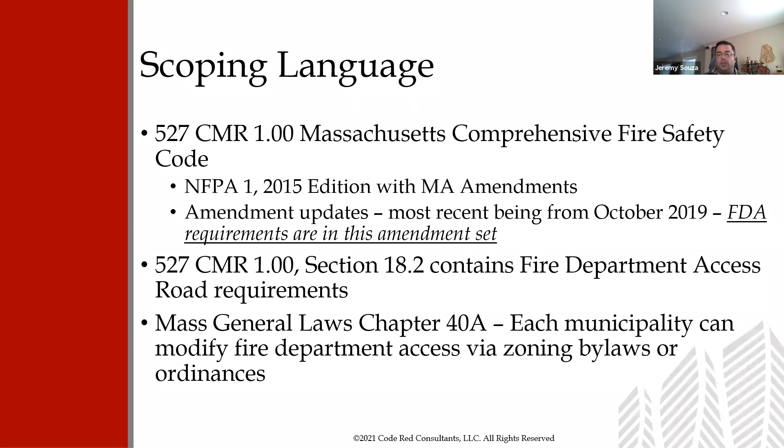Now, beyond that, the fire code flat out says that Massachusetts Chapter 40A overrules anything in 527 CMR, and that's local zoning. So if a municipality chooses to go through its zoning process, they can change all of these fire department access requirements. Roads can get wider, roads can get skinnier. Vertical clearance can get taller or not. Different access things can get thrown in that we're not used to seeing. So while everything we're going to speak to this morning is regarding 527 CMR requirements, keep in mind that the municipality may have changed something in their local zoning, and it would behoove us to take a look at their zoning requirements as we start to dig into what will work for that particular community.

So the roads themselves. Jeremy? Yes. Sorry, quick question. So that seems really unique to me. Is that really not creating local building codes if you can modify the fire department access on a town-by-town basis? It's not the building code. The building stays the same, but what goes on around the outside of the building can change. I think that's how they thread that needle. Interesting. Thank you.

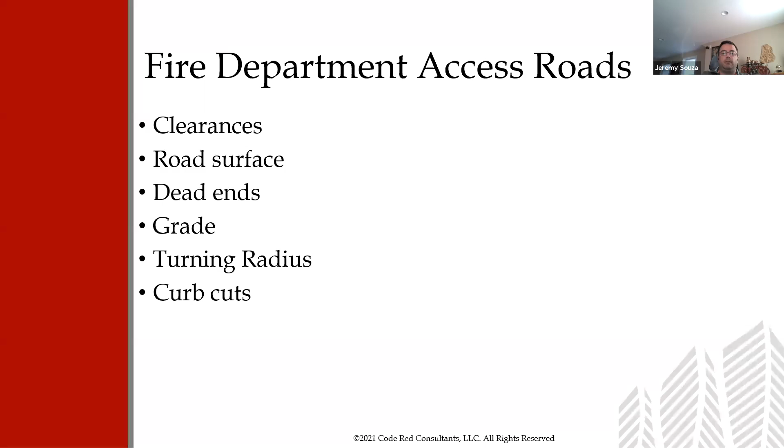So with the fire department access roads themselves, we have clearances, road surfaces, and then some of the curious geometry stuff that we sometimes struggle with. So what is an access road really? As far as code compliance, what does the fire code say? It's a road that guarantees I can put a fire engine next to the building. Unobstructed 20 feet, vertical clearance of 13 foot 6 inches.

And if I have boulevard roads, which we'll speak to a little bit later, lanes between 10 and 20 feet cannot provide direct access off of those. And again, we'll speak to exactly what that means later. So from the code compliance world, if your road is less than 20 feet, or does not have unobstructed vertical clearance of more than 13'6", it's not a fire department access road.

Full stop. That said, in reality, if you can drive on it, it's going to be a fire department access road. If the building is legitimately on fire, the fire department will put a fire engine on your front lawn, or try to drive it through the grass to put it somewhere where they need it to go.

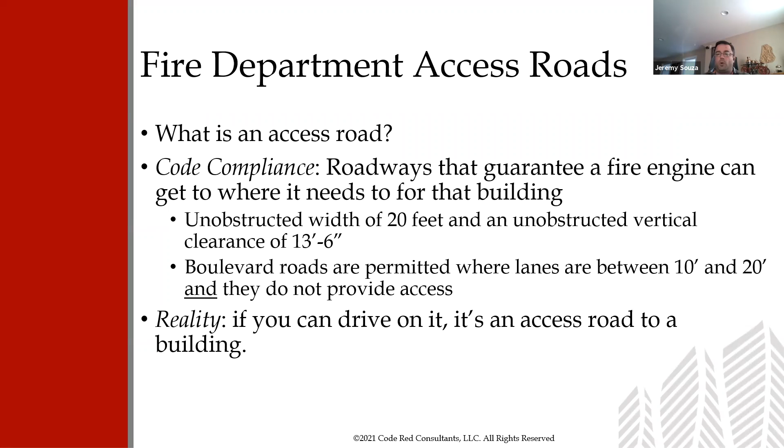The fire code doesn't prescriptively say, yeah, that's okay. So that turns into a little bit of a touchy subject in some cases, that the code says you will give us a road, even though we all know we're going to do off-road driving potentially to try to get where we need to. So this width and height thing, why 20 feet, why 13.5 feet tall?

Most fire engines are 8'6" wide. There are some that are a little bit wider than that, plus the mirrors extend a little bit beyond. If you have a ladder truck, they can be up to 13 feet tall. Most of them are just about 12 feet tall, but you can have some that are 13.

On tops of fire engines, there is equipment that firefighters have to stand on top of the truck and remove the equipment. They're already 9 to 10 feet up in the air. Now you put a 5.5 to 6 foot tall firefighter on top of the truck, and there's where we're getting 13 feet.

The trucks will likely need to be able to pass each other. So if I've got two trucks that are 9 feet wide, a 20 foot wide road is just about enough to get two trucks to pass if they park them right.

To be able to squeeze trucks into the scene, sometimes they'll need to be able to park next to each other. And ladder trucks have jacks or outriggers, little arms that come out of the truck to stabilize it before the aerial can be lifted out of the bed. That requires additional width for the truck, sometimes up to 18 or 19 feet, depending on the manufacturer of the truck.

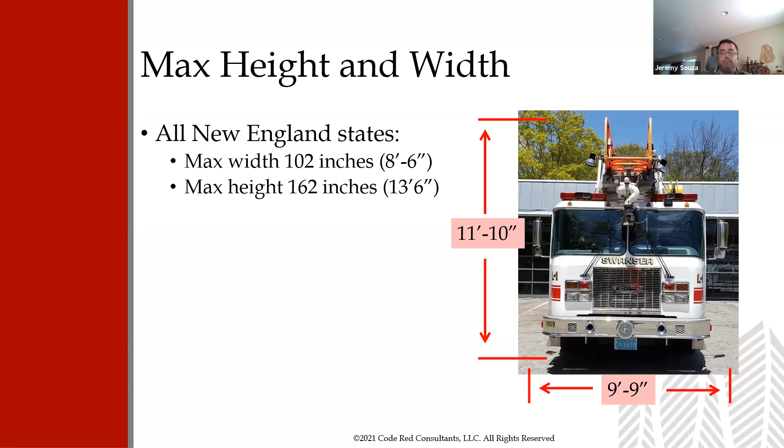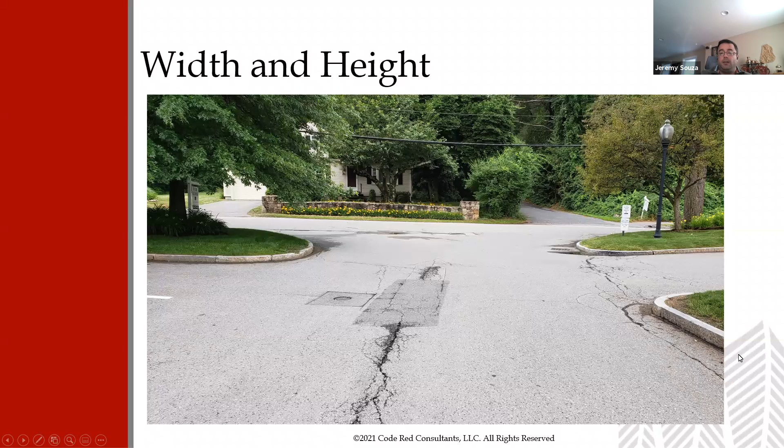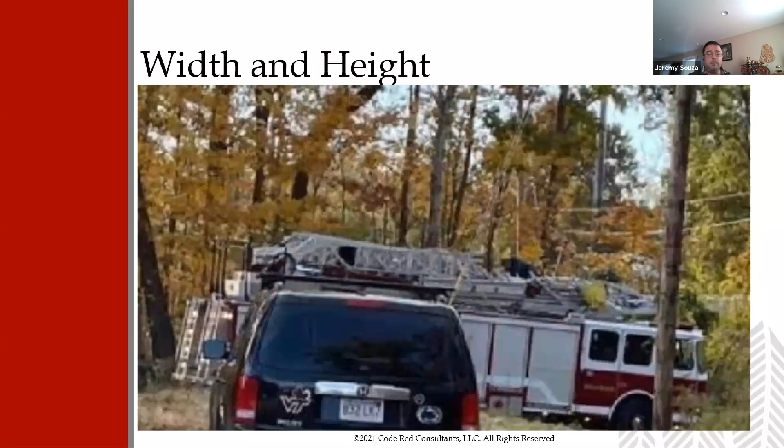Nothing has changed with the facility since the 1950s, except for their fire alarm system, I suppose. But this is the roadway that we have to use to get to it. It is far from 13'6" vertical clearance and far from 20 feet wide. But again, it's existing. It's something that's tolerated by that community.

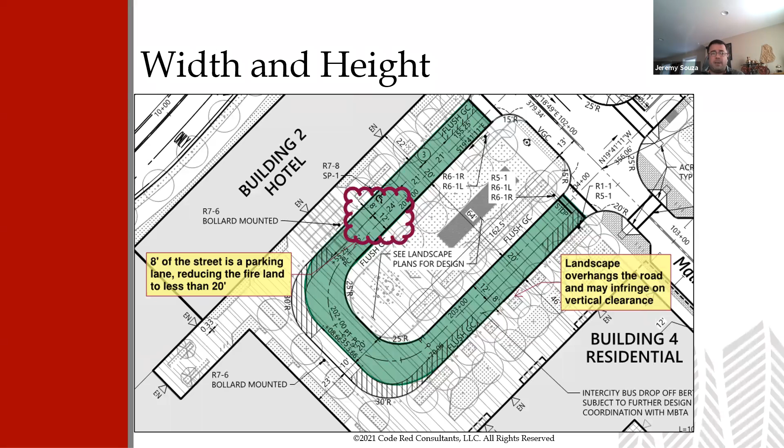which trees are great. I spend many of my free hours in the woods, so I'm perfectly happy with trees. That said, trees and fire trucks do not necessarily mix. As the trees overhang the road, now you reduce that vertical clearance. And at some point, 20 to 30 years from now, sure, the trees might be over the road and be able to be pruned back. But for some period of time, that's probably not going to work out.

So you can see with this particular drawing for this subdivision or this development that's going in, they're showing the road is 24 feet wide. Excellent. That's what we like to see. The wider the roadway is, the better in most circumstances, at least from the fire department perspective.

We talked about boulevards briefly. If you're not familiar with what a boulevard road is, this is a picture of one. So you've got two lanes in opposite directions, separated by some sort of a median or an esplanade. The requirement with boulevard roads is that the road itself, nothing can come off of it. So really, this roadway just becomes a conduit to get to the end of that roadway.

As you can see in this case, there's houses, driveways of houses that are entering this boulevard. As far as the fire code is concerned, that's no longer permissible. You're not allowed to have anything that comes off of a boulevard road. Local zoning, however, said that this is okay for this particular neighborhood.

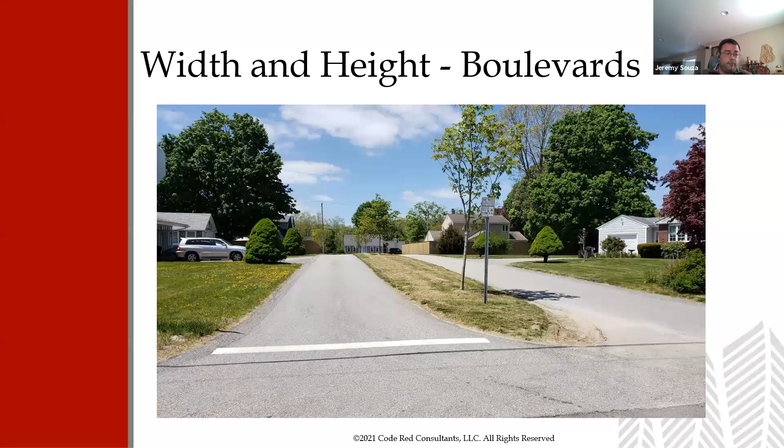Excuse me for a second. There we go. All right.

Gates. You are allowed in certain circumstances to have gates across roadways with fire department approval. And the approval of the AHJ is always, again, a very squirrely and wiggly thing. If you are anticipating a gate for the project, please make sure it is a UL listed gate. UL 325 is meant for vehicle roadways, and it includes automatic openers for emergency vehicles.

Usually those automatic openers are a microphone that's listening for a certain type of siren that most emergency vehicles have. So you can set the siren to this yelp mode. The gate hears it and opens up automatically. Some gates will have essentially a garage door opener. And the intent is that the owner of the building or the owner of the property will give that garage door opener to the local fire department and say, here you go, now you can get through my gate.

The downside of that is at some point you have too many gates and you have 30 or 40 garage door openers hanging across the roof of your fire truck, trying to remember which one it is that opens this door. So most fire departments are hesitant to go the garage door opener route.

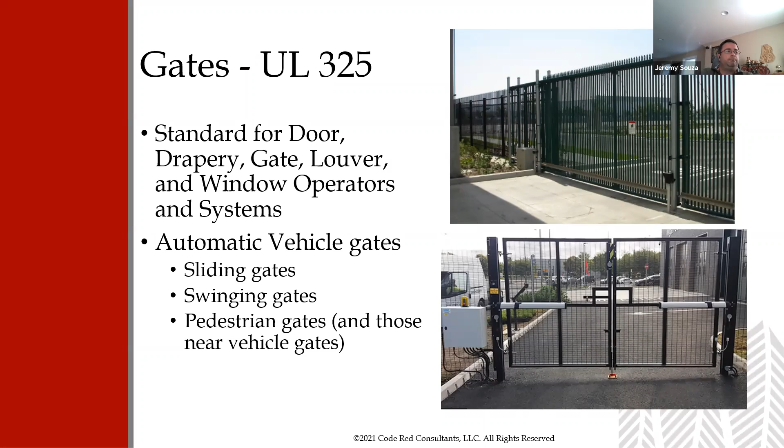So that's it for the road itself, the vertical height and the width. Let's talk a little bit about the surface for the road. It's got to be strong enough to support a fire truck. Well, what exactly does that mean? So the imposed loads of fire engines, an engine or a rescue can weigh up to 54,000 pounds. Usually that 54,000 pounds is spread across 6 tires, in some cases 10 tires.

Ladder trucks and tankers can weigh up to 80,000 pounds, spread across usually 10 tires, in some cases only 6 for smaller trucks. For aerial ladders, when they put those jacks out, the ground pressure underneath those jacks can be up to 75 psi, which is quite a substantial loading.

We'll often see in designs, and this comes from the civil engineering folks, this H20 requirement, or HS20, HS20 being a semi-trailer. There is a newer standard for H25, which is a little bit stronger, but I haven't seen H25 come across any drawings that I've reviewed in the past 6 or 7 years, I guess.

This H20 requirement is a 32,000 pound axle, so you can have up to 8,000 pounds per wheel because you can have up to 4 wheels per axle. That said, the front axle is only 2 tires, so that's only 16,000 pounds. Really, make sure the civil engineer knows what's going on with this when they're designing your roadways.

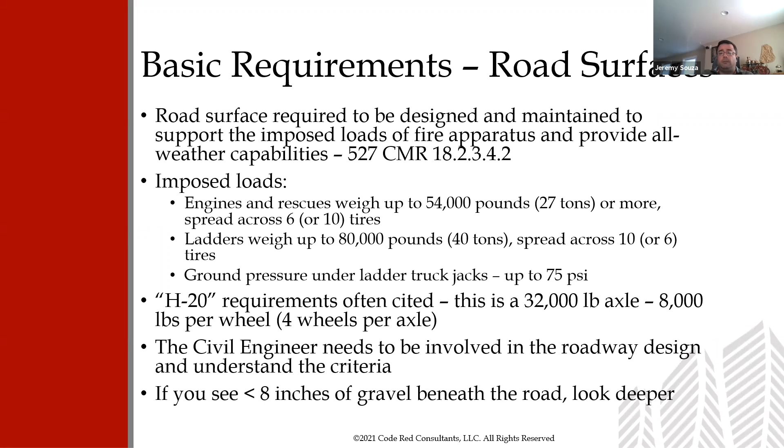And from our perspective, on quick plan reviews, if you see a sectional drawing of a roadway and you see less than 8 inches of gravel underneath the road, start asking questions. If you're less than 8 inches of gravel, something weird is going on, and we probably need to make sure everybody knows what's going on.

The maximum weights that we usually see for fire engines. So we have commercial fire engines, so the front of it looks like an 18-wheeler truck, or the tractor of an 18-wheeler. Custom engine is usually the flat front of a fire engine. Tankers, which carry a lot of water. Then we have ladder trucks, just a regular straight ladder truck or a tractor drawn aerial, the kind with the person who steers in the back of the truck, the end of the trailer.

You can see the weights that we've got here on the steering axle. Obviously, it's the front wheel, and then if you've got a single rear axle or 2 rear axles, how much weight we're putting on. Those ones are overweight.

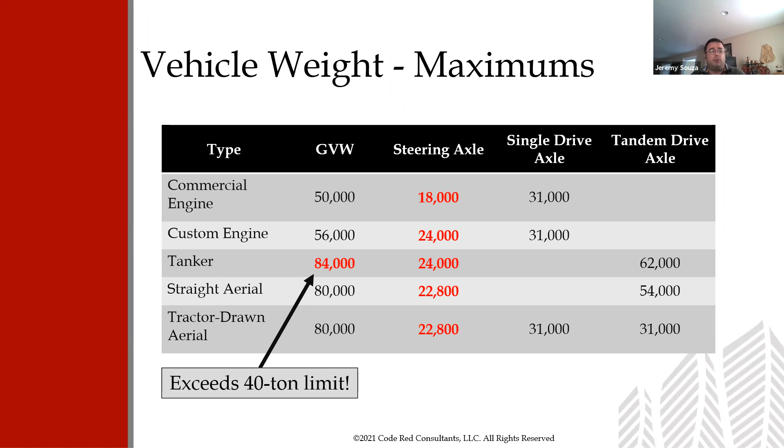So for those H20 requirements, before anything bad happens, we are already claiming, yep, we overload your bridge or your roadway. So this is something that the engineer needs to be aware of. The tanker weights can exceed the 40-ton weight limit. If they weren't fire engines, you would not legally be able to drive them on a public road without a permit. And that 8,000 pound per wheel H20 rating, the front wheels on almost any fire engine exceed that.

As a quick example, this is just one screenshot from one drawing that came across my desk for a culvert pipe. And the design parameters: live load HS20-44. So that's that H20, the S for semi-truck, so there's an extra axle thrown in. And the -44 means it was the 1944 edition of that standard, which is still the one that's in use today.

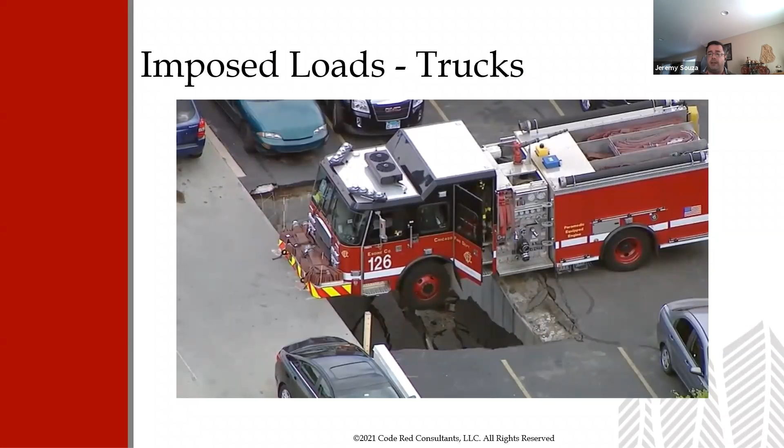When it all goes wrong, this is what happens. This is Chicago Fire Department. They were driving across an elevated parking structure, and the parking structure gave way. Which again, that's a bit of a surprise. This was a washout of a road. This is Los Angeles, California. And again, this is more of a road maintenance issue as opposed to a design issue, but still a roadway weight bearing capacity problem.

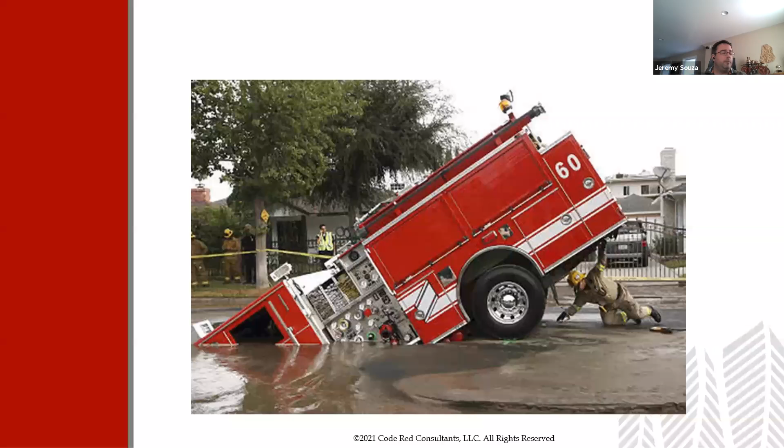So we mentioned briefly earlier about aerial ladders and those jacks. These are the jacks on this particular model of ladder truck. They come out about 2 feet, come down to the ground, and they will lift the entire truck off the ground. In this case, this ladder truck weighs 66,000 pounds. That 66,000 pounds is going to be distributed across 4 square feet as this truck is lifted up. And the weight is going to shift around as the aerial moves. As we rotate the ladder off to one side or the other, you'll shift the weight of the truck from one jack to another.

Realistically, the NFPA 1901 standard for how to build fire engines says you can have up to 75 PSI ground loading. That said, I can take an 80,000 pound tower ladder, put the jacks down, and manage to get the truck to balance on 2 jacks. Eventually, it's going to settle onto at least 3. You should have it across all 4, evenly distributed, but sometimes weird stuff happens. Realistically, you can have up to 278 PSI underneath those jacks, which is an awful lot of weight for the pavement to be bearing.

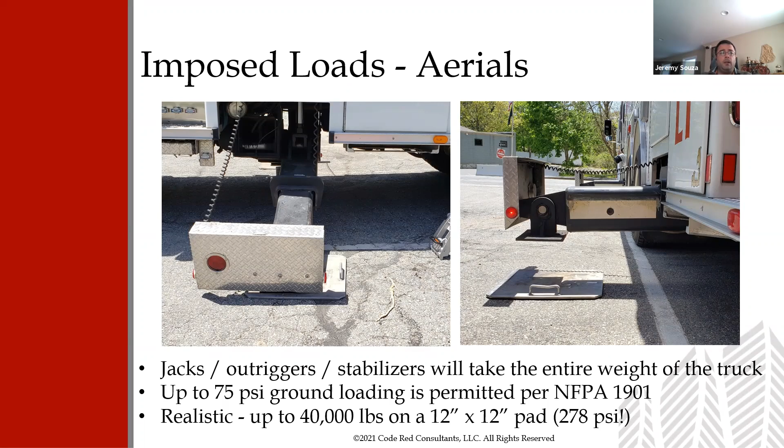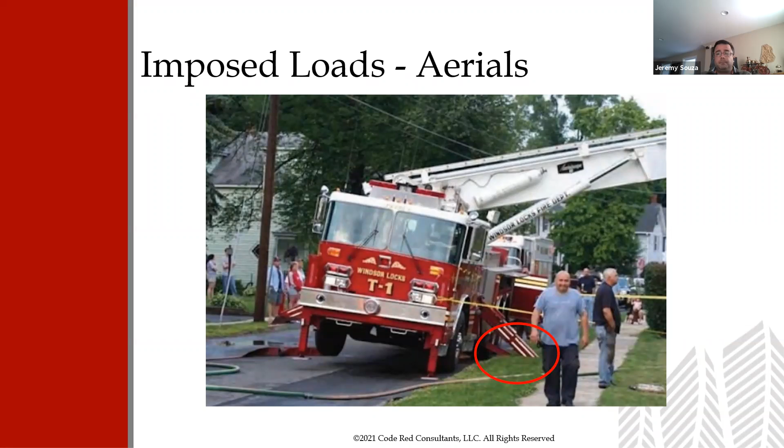Road surface itself is usually asphalt or concrete, just like almost any road we see anywhere. In a lot of communities, particularly rural communities, gravel might be acceptable, and that's totally up to the locality where you are. Geogrids, which we've seen underneath gravel, have a maximum of 200 tons per square meter, which comes out to 284 PSI. That's a pretty strong surface to be able to operate a fire engine on.

We've also had some projects recently where the design team wanted to use essentially a grass roadway using permeable pavers, but make the roadway completely blend into the grass. From an aesthetic standpoint, sure, it looks great. From a maintainability standpoint, the first time it snows, a snowplow is going to take all that grass and roll it up in a big muddy mess. So from that perspective, I would hesitate to push that.

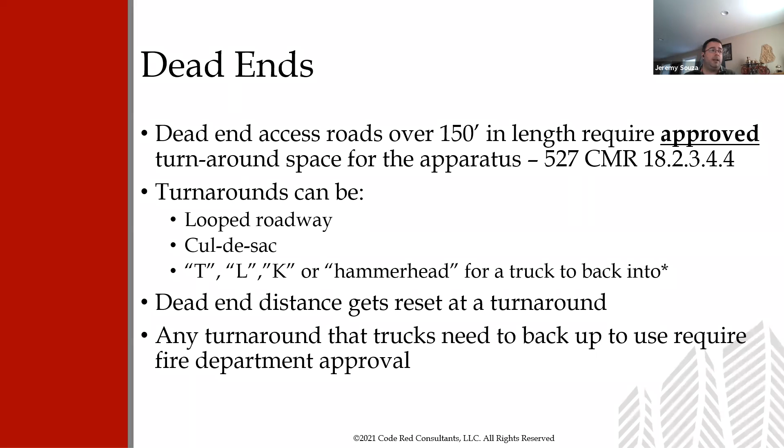And again, it's that approved word. Once we throw in the fire code, something has to be approved by the AHJ. Now the sky is the limit for whatever they want to demand. And that makes it very difficult for us to predict what's happening.

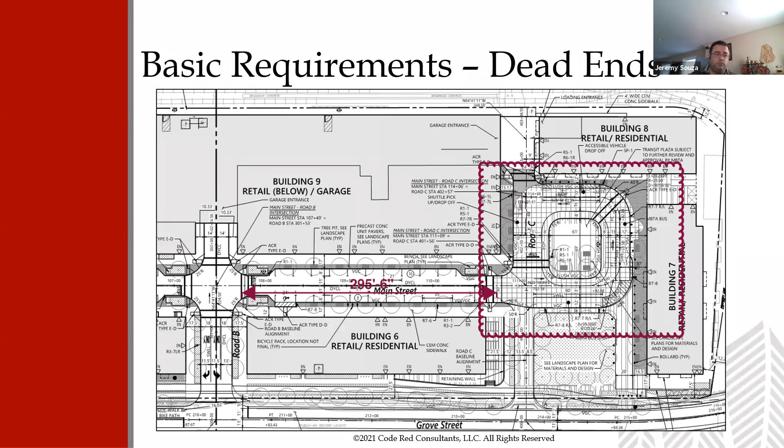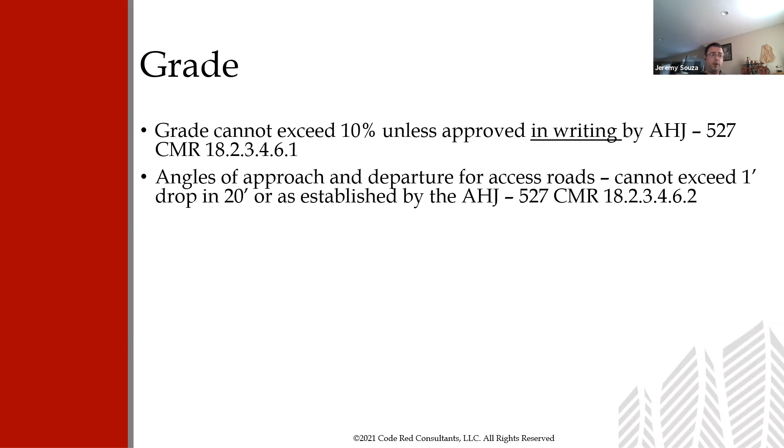So grade, how is our road pitched? Grade cannot exceed 10% unless approved in writing by the AHJ. This isn't, oh, we had a meeting with the fire department and they said it's okay. You need a letter from the fire department that says grade can be more than 10% if you have that on your project. Angles of approach and departure cannot exceed 1 in 20, or as established by the AHJ. And we'll speak to why that can be such a big deal.

And grade means a couple of different things. We have grade along the axis of the road, so driving up a hill or down a hill. That's fair. When we think of grade, that's usually what comes to mind. We also have cross grade. If the road is banked or pitched, or if you have a parking lot that's on a slope, both of those can be extraordinarily dangerous for fire apparatus.

And if you really are grading any paved areas up next to the building, you're probably going to get a question. And I don't say grade like, you know, we had to pitch the parking lot a 1/4 inch per foot so water doesn't accumulate in the building. This is more to a, wow, I think I might need stairs here because it's such a steep pitch.

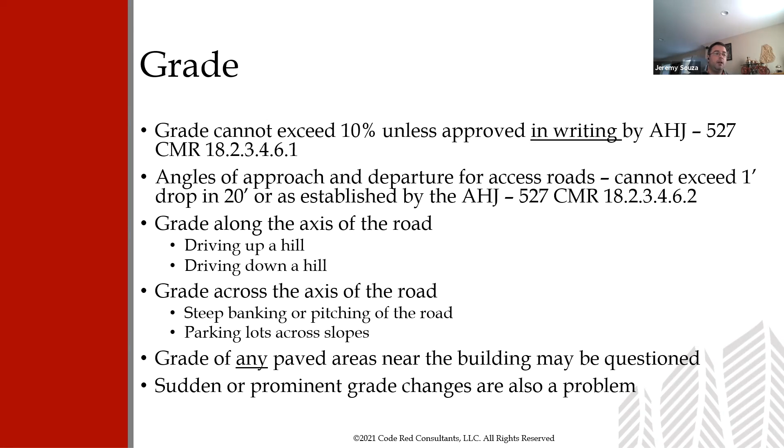Very sudden grade changes are also an issue. So those grade changes, this is the angle of approach that we were speaking to, that whole 10% and 1 in 20 number. The angle of approach is, as a fire engine drives up to a sharp hill, or any vehicle drives up to a sharp hill, how steep of a transition can it hit before it takes something off of the truck?

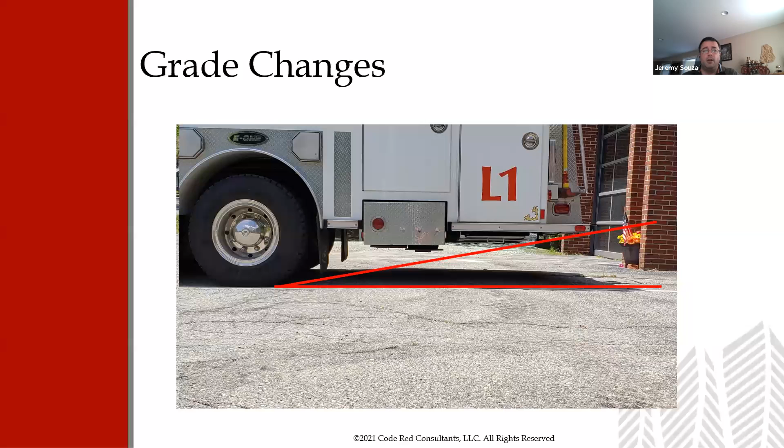We have that same, and this is the angle of departure for the back of the truck. So as they go to drive up a hill, the front wheels, when they hit the hill, lift the front of the truck up, and the back end of the truck pitches down. And if that hill is too steep or too sharp, the back of the truck can get hung up at the bottom of the hill and either crush the back of the truck or lift the rear tires up off the ground and the truck stops moving.

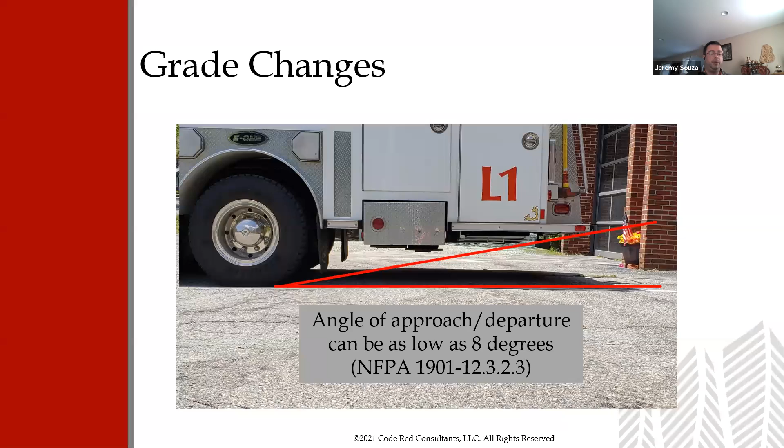So as a visual of that angle of attack, we have our little hill. As our fire engine approaches and drives into the hill, if the hill is too sharp, the front bumper of the truck will smash into the hill, and the truck now is disabled.

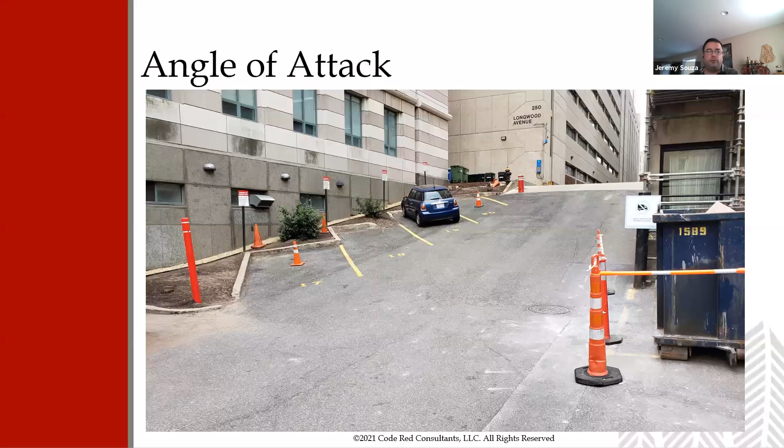So this is an example. I don't know the full background of this little hill, but there it is, the Longwood neighborhood of Boston. This is extremely steep, and the top of that hill is legitimately a sharp edge. You go up this hill, and it immediately transitions. It's like walking upstairs, just it's a ramp without stairs.

I personally could not imagine driving a fire engine up this hill, but I see shuttle buses driving up it all the time. And if you look at the sign that's on that post, it says no delivery vehicles on this hill. They will get stuck trying to go up this.

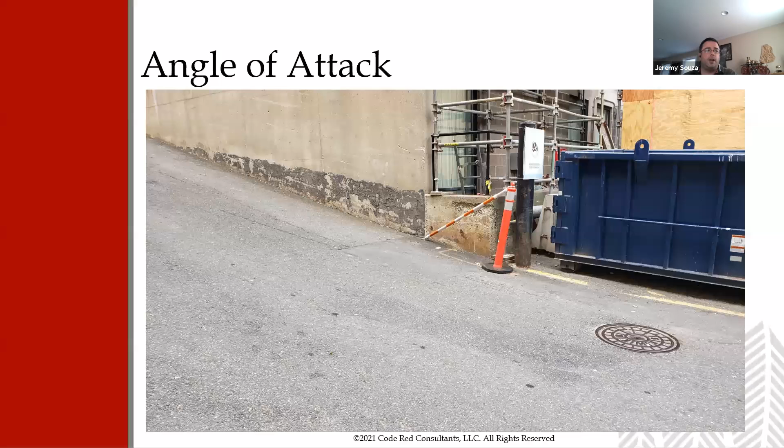Cross grade: fire engines are surprisingly top heavy. So if we park a fire engine on a side slope or try to drive it across the side slope, once the center of gravity of the truck travels outside of the downhill tire, the truck will roll over. So if we make that hill just a little bit steeper, the truck's going to roll over on its side.

Fire engines are supposed to be good for 26.5 degrees on the side slope. That's in a controlled condition at the factory. They'll put the truck on a tilt table, lift the truck up. It has to go to 26.5 degrees before it falls over. In the real world, equipment gets mounted a little bit higher in the truck. Water tanks get filled to different amounts. You know, there's a number of variations that can happen. The truck pulls in a little bit faster. The driver turns the steering wheel at the wrong time. That angle changes and the truck can roll over.

This parking lot is 19.5 degrees, at least according to the level that I put on it. I have personally parked a fire engine on that side slope. One of the scariest things I've ever done with a fire truck. I thought the truck was going to fall over, and that was with an engine. If it had been with a ladder truck, it probably would have fallen over.

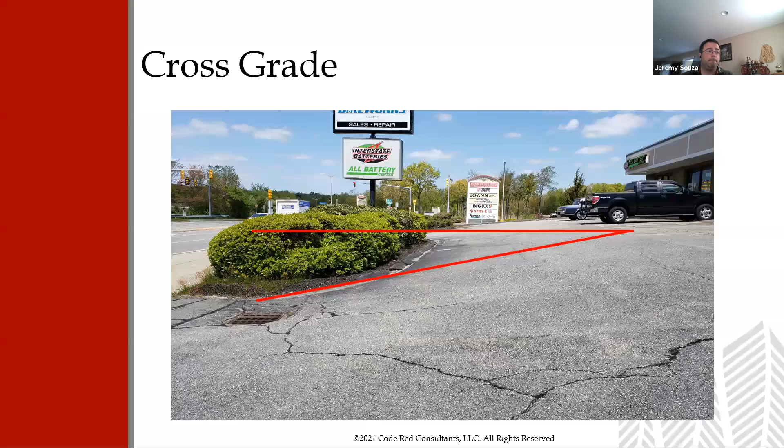Turning radius. This is a big question that comes up very often, and we often help design teams try to work through this. So the minimum inner turning radius for 527 CMR is 25 feet. It can be bigger than that. You can have a wider radius if the fire department determines that their trucks can't make that turn, and there are fire engines that is true for.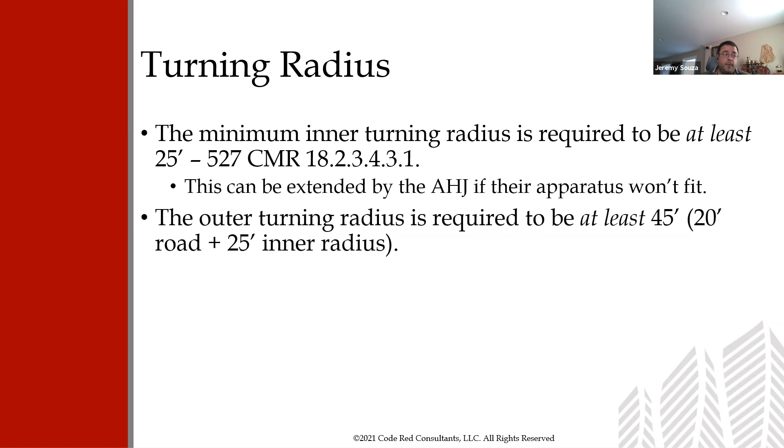The outside of that turning radius has to be at least 45 feet. That doesn't prescriptively say it in 527 CMR, but it does say your road has to be 20 feet wide. So if we take the 25-foot inner radius, add 20 feet to it for the roadway width, now we have a 45-foot outer minimum turning radius. 527 CMR does require a swept path analysis. We'll show you what those look like in a minute.

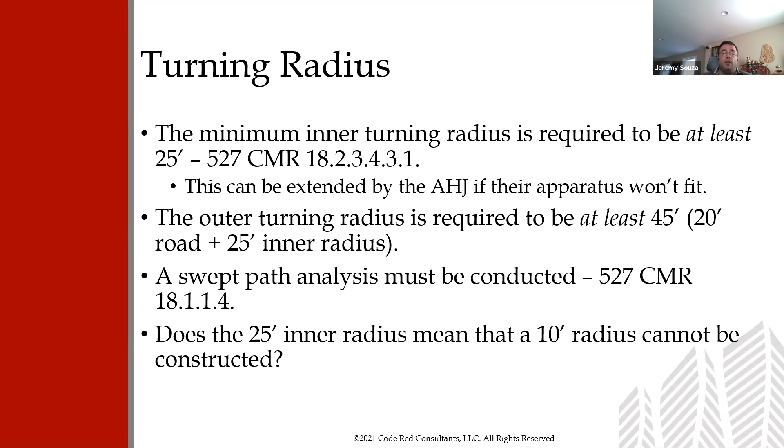Does that 25-foot inner radius mean the design team can't say, well, we want to put a 10-foot radius for this roadway? Because fire code says 25, so we can't do 10. But that's not true. You can do 10. You can do 0. You can have sharp corners if you'd like. But the roadway has to be able to accommodate that 25-foot radius. If you want to visually see a 25-foot radius, that's what they look like.

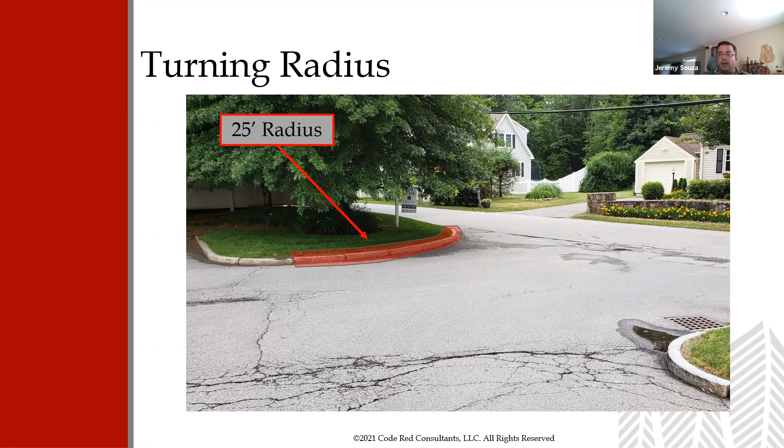Not that you're standing in the rear parking lot of Code Red's office in Southborough, but if you wanted to go in the rear parking lot, that's a 25-foot radius. That is a 1-foot radius. Is that allowed? It depends. Can a fire engine make the turn? I looked at this turn and said, no, I could not make that off of that roadway.

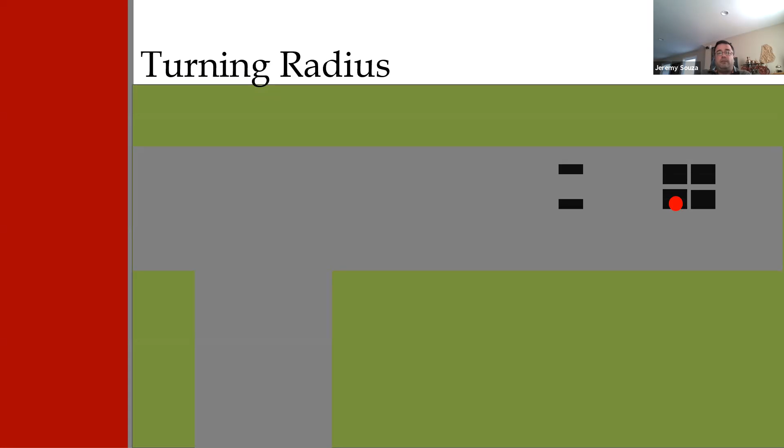So the turning radius, why 25 feet and why 45 feet to the outside? When a vehicle turns, it pivots on, in this case, the middle of the rear tire. If you're ever trying to drive your car in a parking garage or around a bollard, as you back up or pull forward, as long as your back tire on the inside of the turn passes that object, turn the wheel as sharp as you want, you're not going to hit it. Your vehicle is going to pivot away from it. So in this case, this fire engine is going to make a left-hand turn. It's going to pivot on that tire.

So we'll come tearing around the corner. We have the track that the tires took. You can see the part of the truck gets a little bit wider. As the wheels come around, they don't track together. The rear tires track inside the radius while the front tires stay on the outside of that turning radius. But fire engines also have overhangs. The front of the truck overhangs 3 or 4 feet. The back of the truck can hang over as much as 18 feet for some fire engines. So that turning radius ends up even wider because the body of the truck is outside of the tires.

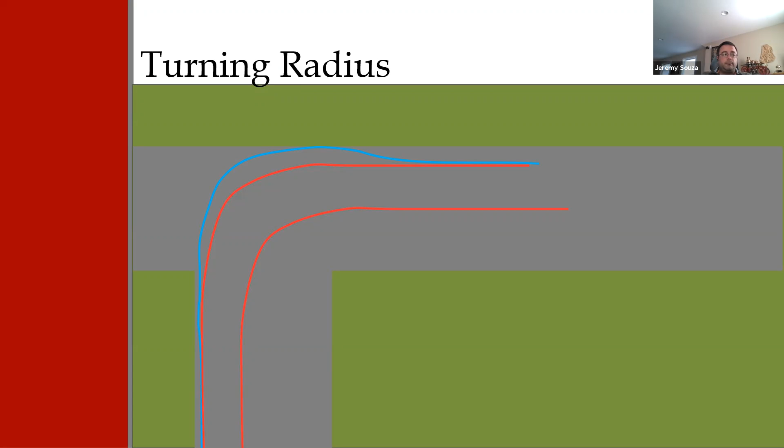So to measure it on your own drawings, we use what we in our office have. I've been 20 years in the fire service. I like donuts. So here it is. This is the donut. The blue area of the donut here is where a fire engine can drive. That's a 25-foot inside radius and a 45-foot outside radius.

And if you look at the drawing that we're on, the radius of that curve is only 15 feet. So how is it we need a 25-foot inner radius, but we have a 15-foot inner radius here? How is this going to work? Really, it's just the donut area that we're concerned about. As long as the fire engine can stay in the donut as it drives through, it's fine. You can have whatever inside radius you'd like.

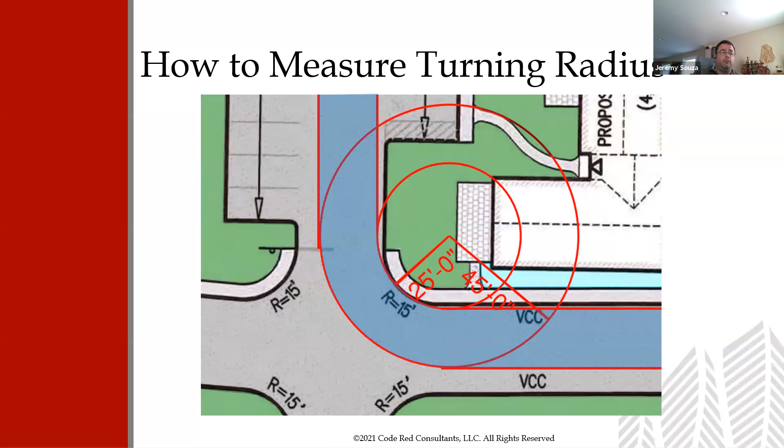This is a different project. This is where the road actually is intended to be. So we don't know which direction fire engines are going to come into a site, so we need to accommodate from the main road here, both left and right. The redded out areas are the grass areas where the donut is exceeded, if that makes sense. So that turning radius, anywhere that's red, would need to be paved if this is the configuration of the road they wanted to use.

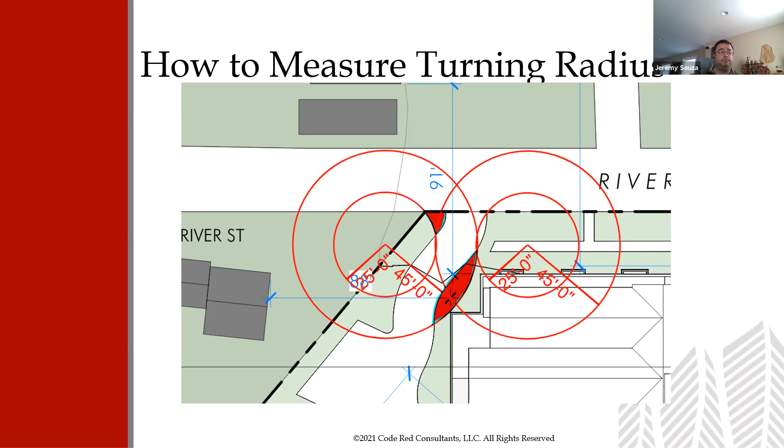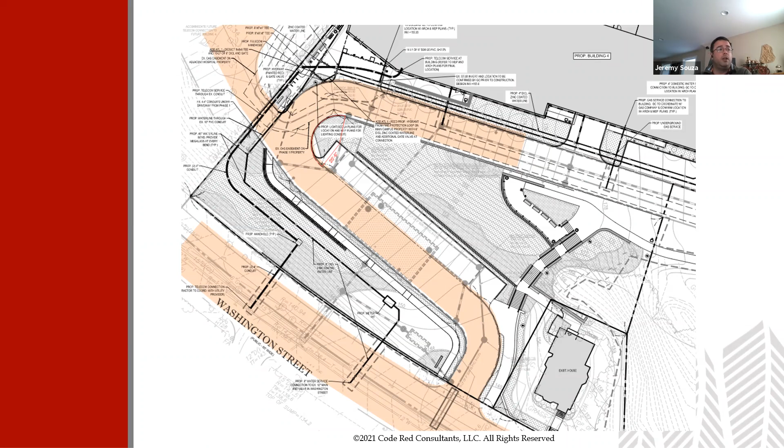This was another project, had nothing to do with fire department access. This was partially a design project for us. This neighborhood, if you see down the bottom, Washington Street, this road snakes up a hill. And you see the light gray contour lines. As I was looking at this drawing for entirely other purposes, I noticed what looked to me like a pretty sharp curve going into the rest of the site.

And it was back up in here. Measured it, it's only 20 feet for the inside radius. Okay, do we have a potential fire department access problem here? So we put the donut on it, and it turns out that no, we don't, because the roadway was wide enough. It met that 25-foot inner radius and the 45-foot outer radius.

So moving on to other things we find in the roads, traffic calming devices are now becoming extraordinarily popular in many locales. Speed bumps we've been familiar with in parking lots for the past 50 years. Speed humps or speed pillows we're now starting to see. The purpose of these is that gap between the pillows is for the tire of a fire engine. So in theory, a passenger car is narrow enough that you would have to slow down to hit these, but a fire engine's tire track fits perfectly in those grooves and they don't have to slow down.

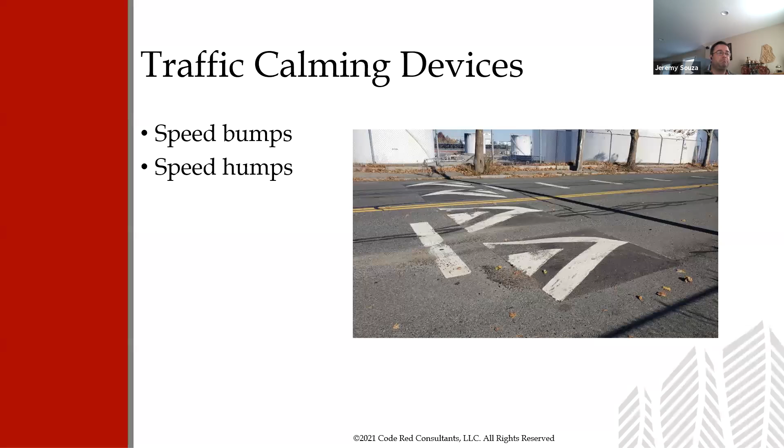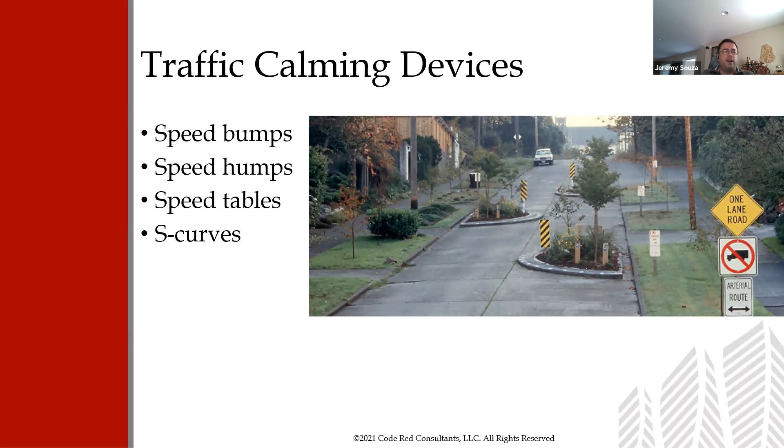I can tell you that the pickup truck that I drive apparently has the same width, because I can drive through that without having to slow down even. Speed tables, usually popular for crosswalks. S-curves or chicanes. I haven't seen any of these in New England yet. I figure it's only a matter of time, but I would be very surprised if a fire department allowed this configuration of a road.

And roundabouts are becoming very popular here in southeastern New England. Whatever traffic calming device you put in, make sure that the fire department knows about it and that they're okay with it. From the perspective of driving a fire engine, this is what it looks like going over one. This truck has to slow down to 7 miles an hour to go over that hump.

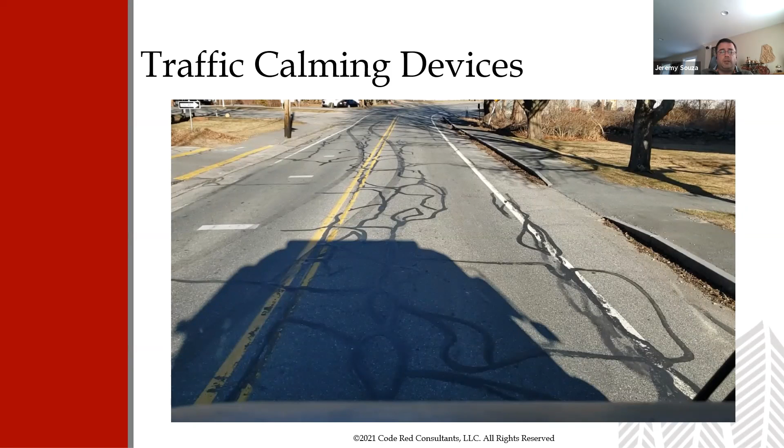There was a study done out of Portland, Oregon a few years ago that reported for different types of traffic calming devices, you can lose anywhere from 9 to 40 seconds of response time by having to go over each different traffic calming device. So being installed on main roads can have a substantial impact on response time for the fire department.

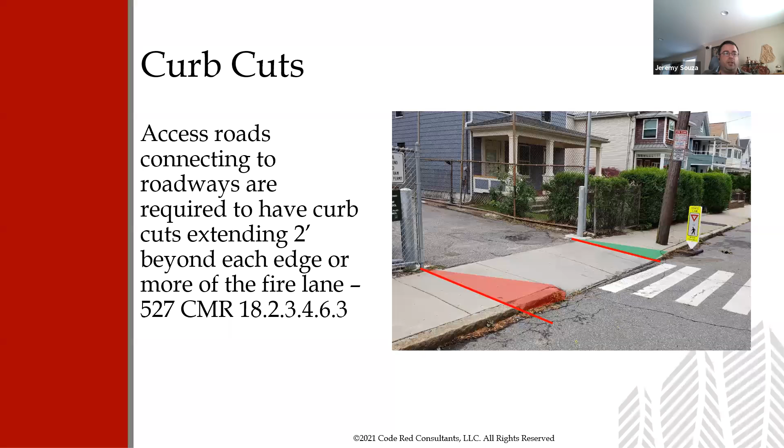527 CMR does reference curb cuts. Curb cuts have to be 2 feet wider than the road on each side of the road. So in this case, the entrance to this parking lot, if we come straight out, the curb cut is supposed to be 2 feet outside of those 2 lines, and it's not. So the green one is 2 feet, the red one is not. And I got this picture because I had to use this parking lot several times and kept driving over the curb. So that's why it ended up in the presentation.

To mitigate curb cut issues, and you can also use these in roundabouts, or really anywhere where you have a potential turning radius problem, with the AHJ's approval, you can propose changes to the curb. So if we do a Cape Cod berm, these are very easily driven over. Yes, it may make a mess of the grass, but if it's just 6, 12, 18 inches that you need, this might buy you what you're looking for.

Having no curb there, but putting brick pavers to show where the edge of the road is. You see this very, very frequently with roundabouts, because tractor trailers can't make that full radius. So they'll do brick pavers with the knowledge and intent that a tractor trailer can almost drive straight through rather than having to follow the lines all the way around.

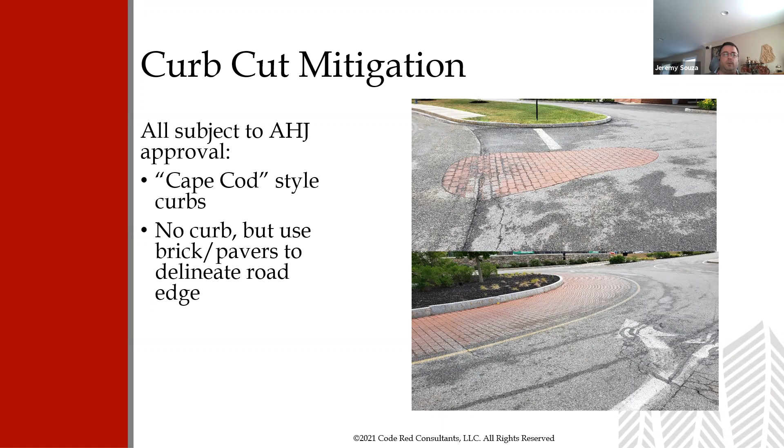Or chamfered curbing. Use regular curbing, but instead of a sharp 90 on it, put a bevel on the side of it. Whatever you're using for the road, it has to be maintained.

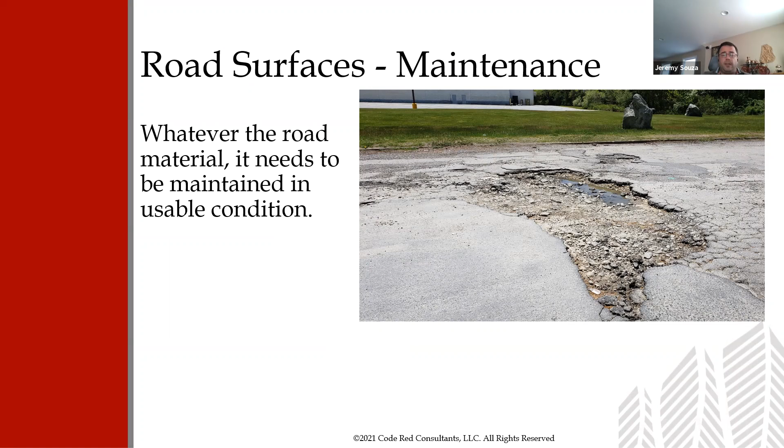If you start developing potholes, or in this case, potholes that would eat vehicles, that's going to have to be addressed by the owner. This is a fire department access road leading to a shopping center. The road has not been well maintained, and this is a very, very difficult place to try to navigate any vehicle, let alone a fire engine.

Fire lanes. Fire code does discuss fire lanes. Fire lanes are at the sole discretion of the local AHJ. So the head of the fire department is who's responsible for designating fire lanes. It is not prescriptively required by the fire code. It's something that the local jurisdiction has the authority to say, we want one here and we want signs, or whatever you have is fine already.

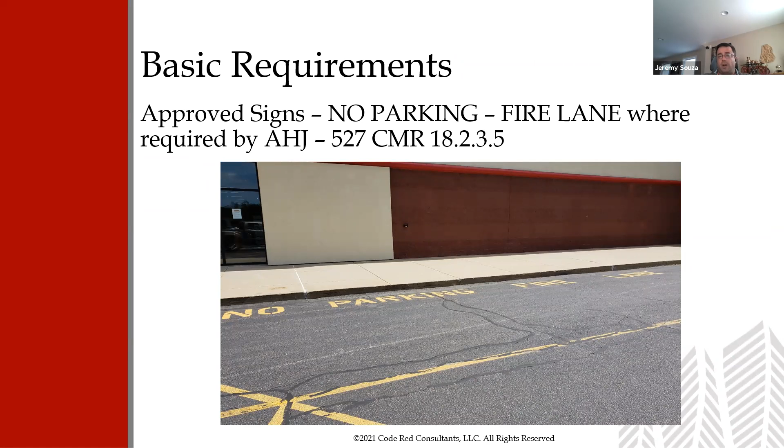So any questions so far? Jeremy, honestly, the chat is still quiet. I hate to say it because I like giving you guys lots of questions, but I think you're just doing a very thorough job. Jeremy, I do have one question.

Please, Greg, go ahead. This is a problem I see not on private property so much as in rights of way over railroad tracks. And I'm thinking of one in Stoneham. They've reworked it several times, and I look at it and I wonder, how does a truck, particularly a fire truck, navigate that? So in the course of these things being developed, do municipalities typically engage with the fire services or whoever is responsible for those rights of way? Is that the MBTA? How does that work?

So you use a 4-letter word in there, MBTA. MBTA is unique in that they're kind of the, no, it's ours and everybody will leave us alone and we'll do what we want. Yes, the local fire department on state property has some sort of impact there, but MBTA very often does what they want to do. So other railroads, there's federal requirements for what railroads are required to do and what they're permitted to do. So you run into that as well. There's some very, very weird jurisdictional overlays when we start talking about trains.

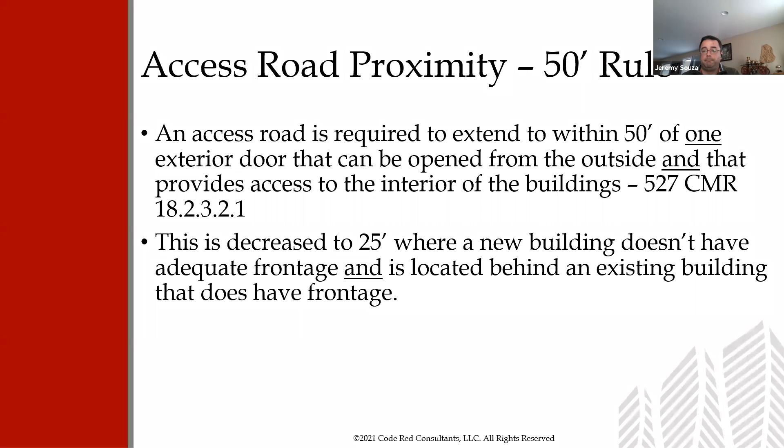If you have a building that doesn't have adequate frontage and it's behind an existing building that does, in my town we call them a hammerhead lot. We have an easement or a right-of-way that travels through and a building behind another building. Now that road has to be within 25 feet of a door, if you're stacking buildings one behind the other.

So the other number we have, we got the 50-foot rule, and then what we in our office call the 150-250 rule. Access roads have to be provided so that the entire exterior of the building is within 150 feet of an access road on an approved route around the outside of the building. So firstly, we have the approved word in there. So the AHJ has a lot of flexibility in what they can accept and in what they're allowed to accept and not.

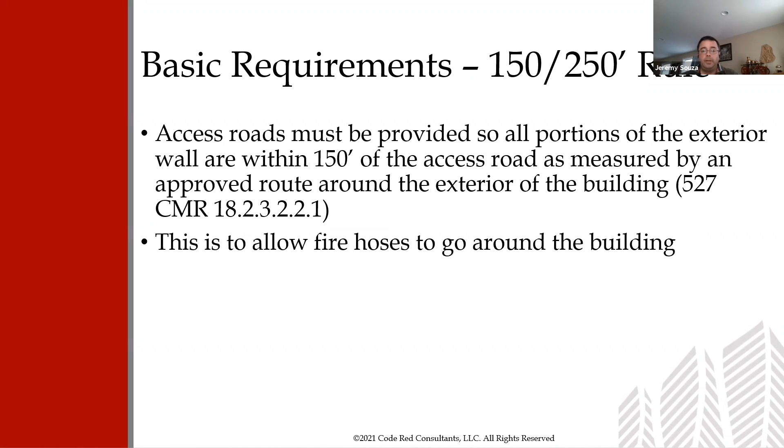And really the whole purpose of this rule is to allow fire hoses to go around the building, that you can run a fire hose from a fire engine and go completely around the building. If the building has an NFPA 13 sprinkler system, the 150-foot number gets extended to 250. That is a Massachusetts amendment. In the base code, it's 450 feet. If you go to Rhode Island, New Hampshire, or Maine, it's 450 feet. But in Massachusetts, it's only 250.

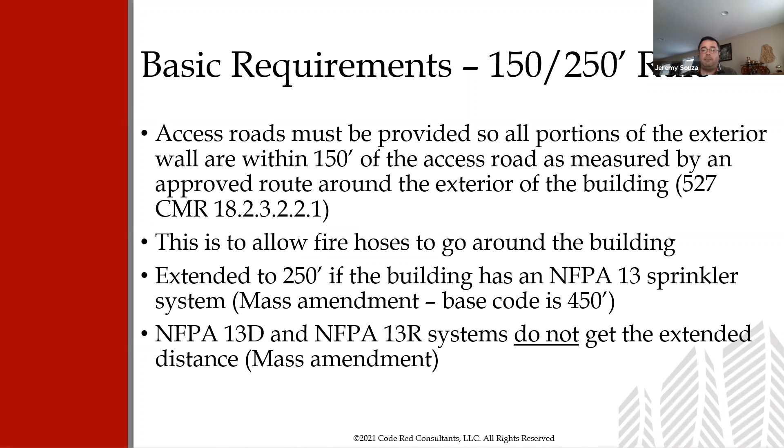Fire code specifically calls out it is an NFPA 13 sprinkler system. It's not a 13D, it's not a 13R. So if you have a 13R system, you're at 150 foot. If you have a 13 system, you're at 250 feet. That's super, super important and critical to some of the workarounds that we're going to talk about in a little bit. Everybody needs to have their mind wrapped around that you have to use a full 13 system to get that exemption.

So fire hoses on a fire engine are usually stored just above the pump panel. Immediately behind the cab, there's 2 or 3 racks, usually called crosslays. The fire hose that's on that is usually 200 to 250 feet long. That's where we get the 150 and 250 foot numbers from, is the length of a fire hose. And that's about the maximum amount of fire hose that a single crew on a fire engine can extend around a building.

Do not cross retaining walls of any height. And this stuff is not in the fire code. This is from being on the receiving side of fire department access, what the firefighters and the fire service are going to be looking at for those numbers. If you have a retaining wall of any height, somebody's going to fall off of it while extending a fire hose. End of discussion. They are not going to accept any sort of retaining walls if you have to go over them.

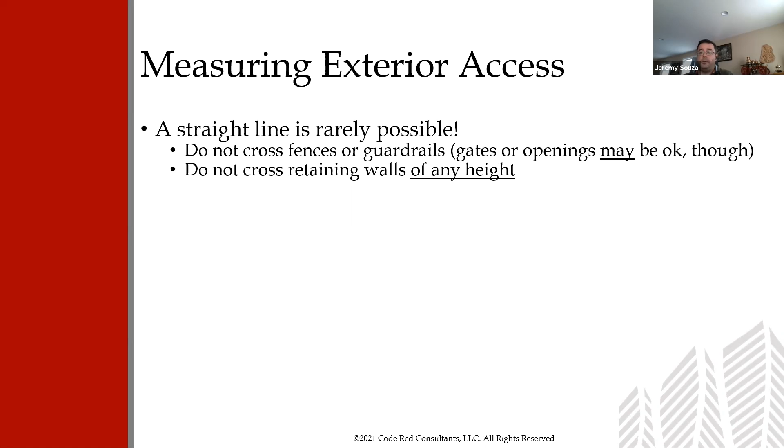Jeremy, I'm just curious, on the not crossing fences or guardrails, if the fire department doesn't have any other options, will they consider just breaking or damaging the fence or the guardrail to get in? Or will they just say, I can't do anything about it? In the real world, if there is a fire, they will break through whatever they have to break through. But they're not going to permit you to build a building and say, go ahead, you can block it off, we'll worry about breaking stuff later. They're going to request that easy access be given ahead of time. Makes sense.

Thanks. Avoid steep hills. So what is a steep hill?

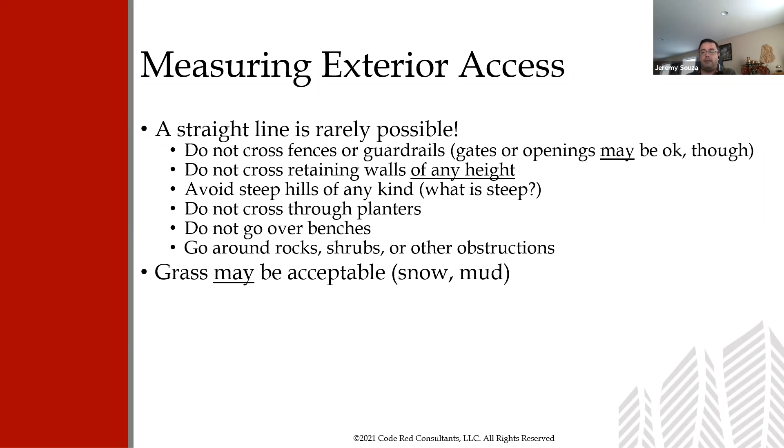If you would think you would probably want stairs on it, that would be, I would consider, a steep hill. Do not cross through planters. Don't go over benches. Go around rocks or shrubs. Again, that kind of ties in with the planters. Grass might be acceptable, but in New England we have snow, and come April and May we have mud. Fire department, you've got a grassy slope, fire department's probably not going to accept it.

Improved walking paths are usually okay. Question then is, how wide does the path need to be? And the number that I generally give people, if you need 48 inches for your exit width, your pathway should probably be 48 inches. That's probably the best way to look at it. Whatever your required exit width inside is, just continue that outside until you make it to the public way. So your exit discharge just has to be wide enough overall.

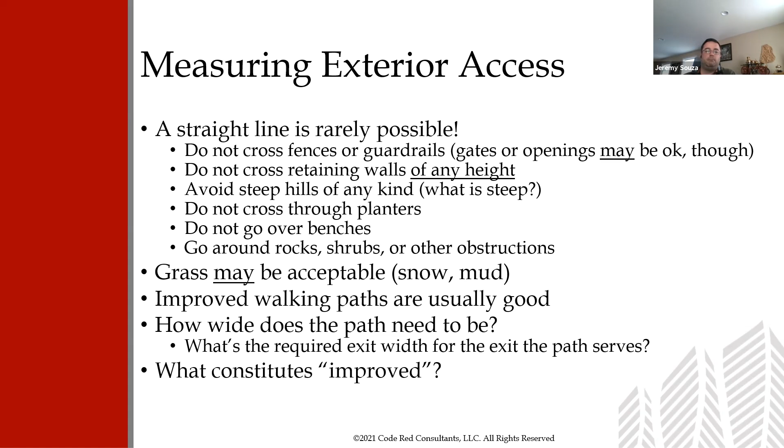Might get into stuff about carrying ground ladders. If you get into that, give me a call. We'll work through it. And then what constitutes an improved walkway? Does it have to be concrete or asphalt? Maybe. Is gravel okay? Is stone dust okay? Maybe. Pavers are probably okay. If you're saying it's just grass, that's probably not going to be good enough.

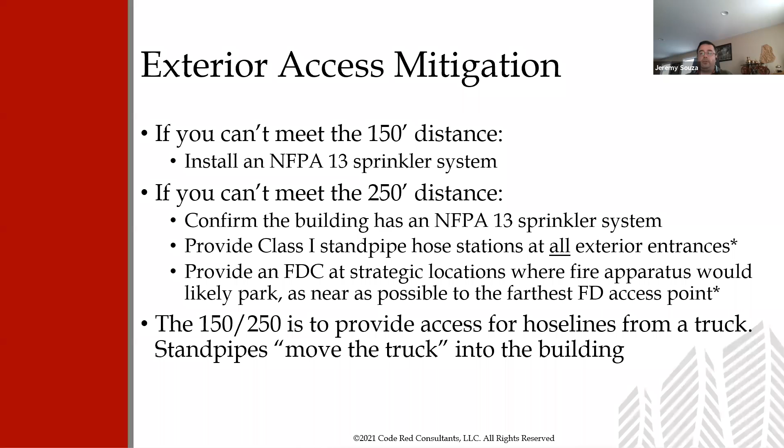And if you think the other direction of a high rise, if I've got a building that's 1,000 feet tall and I put standpipes through that building, what's the difference if I take that 1,000-foot building and lay it on its side? Now I'm still 1,000 feet long, and there's just less stairs. So that's one alternative that we have found good success with. Your mileage may vary again, depending on personalities.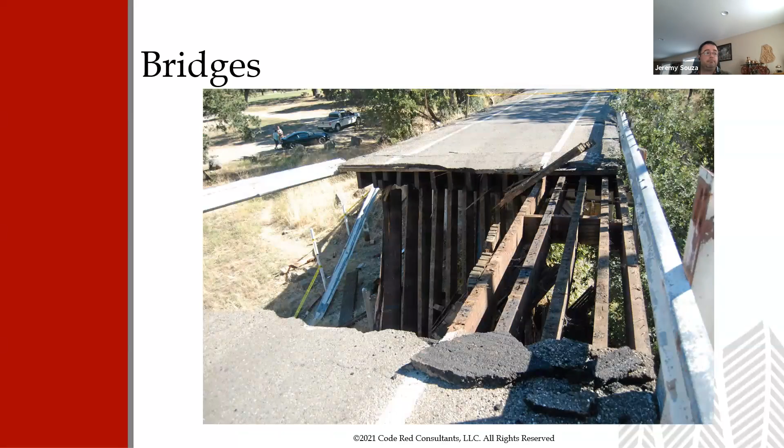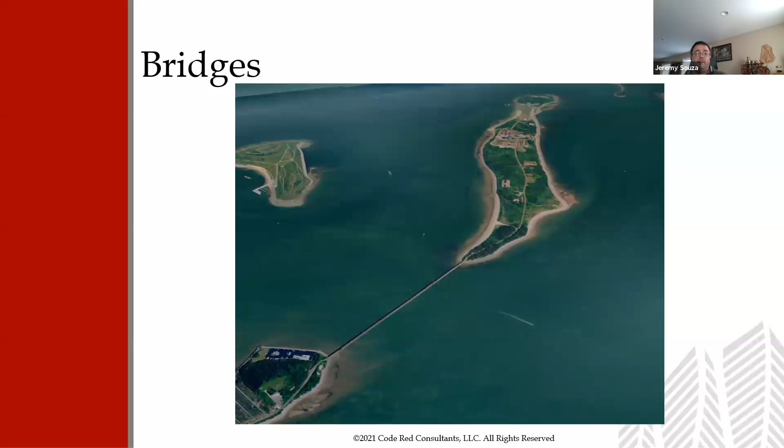That said, the bridge over time became a maintenance problem and the city got rid of it. Once they got rid of the bridge, they also got rid of the hospital. So that's all vacant now down on that island. And that's all that's left of it today.

So when we want to get into the 50-foot to the entrance number, watch out if you've got overhangs, because that might eat up some of your entrance ability for that 50-foot rule.

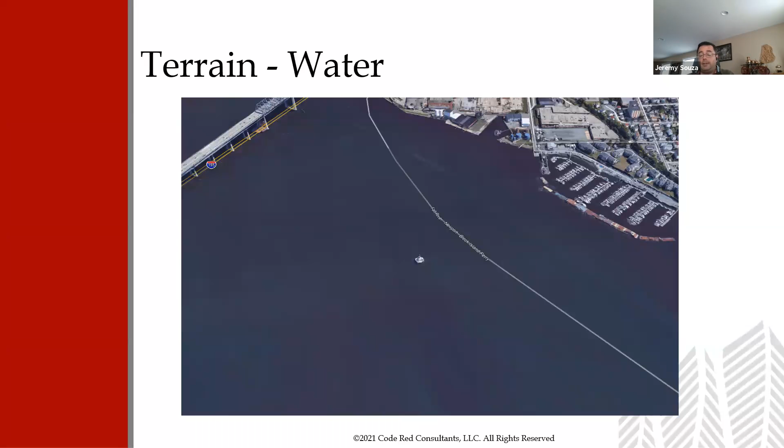Well, the fire department has a fireboat, and they were okay with this non-combustible building with the features of fire protection that the lighthouse has. The fire department accepted that, yeah, we can get out there and rescue somebody if we need to. So it never hurts to ask, I guess, is really where that comes to.

Really, every community has its own tolerance for what they will accept. Bigger cities are usually okay with narrow alleys and tall buildings. They're used to it. They are not okay with long distances to fire hydrants or to fire department connections. They don't want to pull a lot of hose. I pull up to the building, everything I need is right here. There's a hydrant across the street. There's the fire department connection right here. There's the door. Let's go inside.

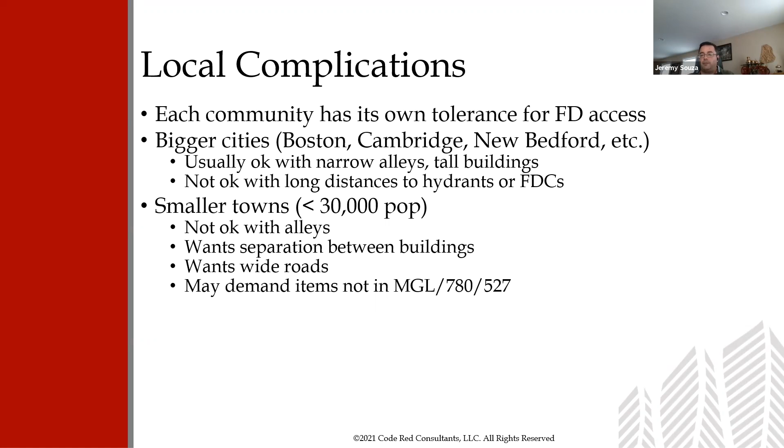If you get smaller towns, usually they're not okay with alleyways. They want separation between buildings. They want wide roads. And I find more often in small towns than the bigger cities, the requests start to come in for things that are not in the fire code, the building code, or Mass General Laws. We want this thing. Well, you can't ask for that thing. And obviously we all know when you tell the fire department or the building inspector you can't ask for that, well, the game is now on and you will pay.

Local opposition also ends up coming out in fire department access. So if you have a development or a project that's going in that is contentious in the community, this may be the mechanism that is used to shut that project down. If you have plans that were previously approved and, oh, we changed our mind, we want this now. The moving of goalposts. Hey, you met this requirement? All right, we'll add this one in. Oh, you met that one too? Okay, here's another one. Or again, for things that are not in the fire code or the building code. We've seen aerial access.

We need to be able to put a ladder truck to all sides of the building. So you need to give us a roadway around the building. Collapse zones: we won't park a fire truck within 50 feet of the building in case the 50-foot building falls down on top of the truck. So you need to give us a roadway that's 50 feet back. We want a road that wraps around the entire building. We don't want to have to walk. We've seen those all appear.

So case studies. Let's look at some of the real life implications here. So we've got a new residential building. It's not assisted living, but it's senior housing, built in the middle of a wetland. This project had something along an 8 or 10 year negotiation with this town's conservation commission to get the site plan set in stone. And it is not changing. You want to move this retaining wall? No, it's going to take us another year. This is where the plot plan is staying.

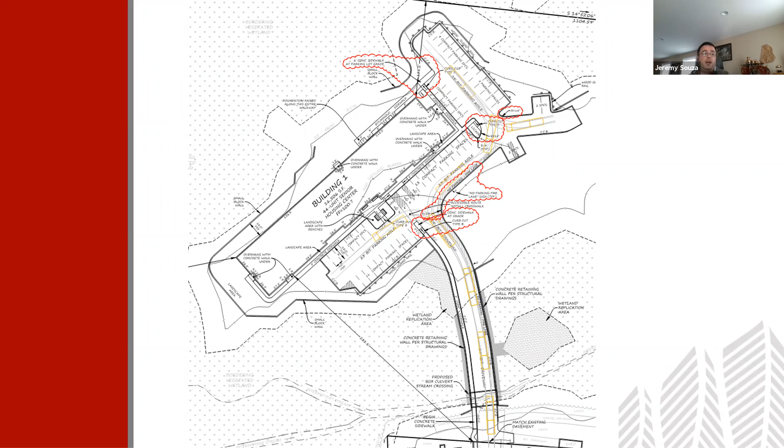So here's the building. You see the building on the left-hand side, and you see the wetlands that are surrounding the site. It was almost like an island in the middle of a swamp. So with this roadway that we've got here, what kind of sprinklers do we have in the building? Well, it's a residential building. It's 3 stories tall. We would usually expect to see a 13R system. If it has a 13R system, I do not get my 250-foot allowance. I'm stuck at 150. So we bump the sprinkler system up in the building to a full NFPA 13 system.

The site plan is set in stone. It's not changing. Can we move the parking spaces around? Can we add pavement? Well, the answer was no for adding pavement. So instead, can we use permeable pavers? They allow groundwater infiltration. Does that buy anything? Well, yes, you can put this much permeable pavers and we'll allow that.

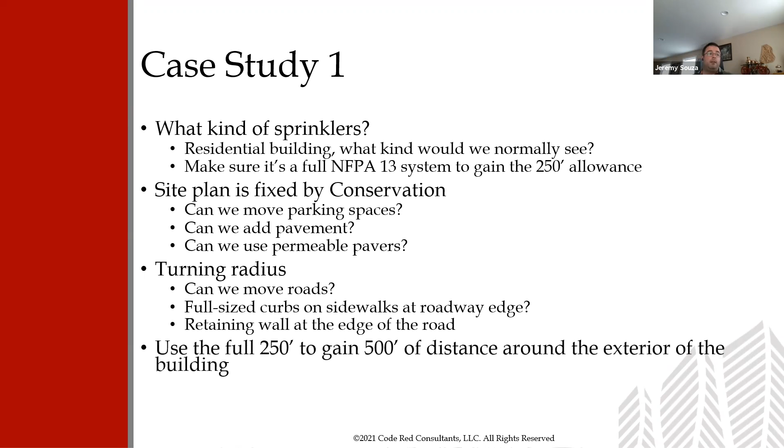And then turning radius. Can we move the roads around a little bit? The answer was no. Instead of using full-size curbs, we put Cape Cod curbs in. And now the fire engines can kind of track over the edge, and the ownership and the fire department were both okay with, yeah, you can have your tires go over the grass. And make sure the bridge can support fire trucks. So there's what we ended up with, the proposed access road for fire engines. Met our dead end requirements. They were both less than 150 feet and provide adequate backup space.

And the fire department for this community was awesome to work with. Everything that we proposed with a, here's how we're going to try to make it work for you, they were totally on board. They were in no way aggressive with us. They really were a pleasure to work with. I will give you one great hint. If you go to the fire department and any of your requests start with the word just, you're going to lose. If you say just do this or just do that, the answer will be no, and you have now created a contentious situation. Try to figure out from the fire department how they do things and skew the conversation towards how we can make our project work with what your normal operational procedures are.

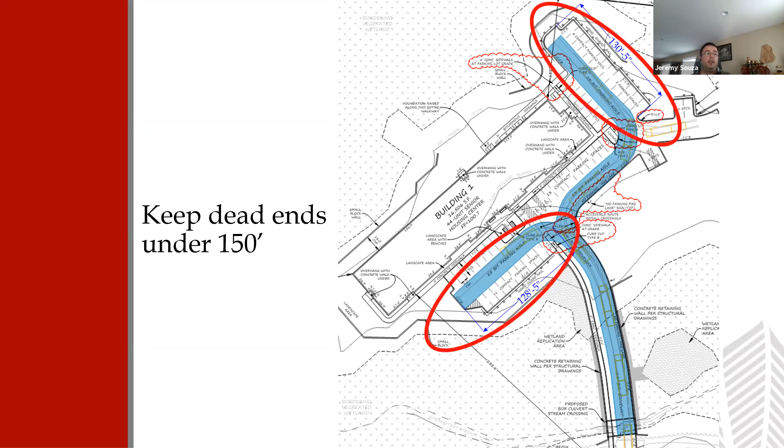So getting around the building, we could get the roads tight enough up to the edge that we're less than the 250-foot number. In fact, it was 240 feet from both directions. So just came in a hair under, but that's all we needed.

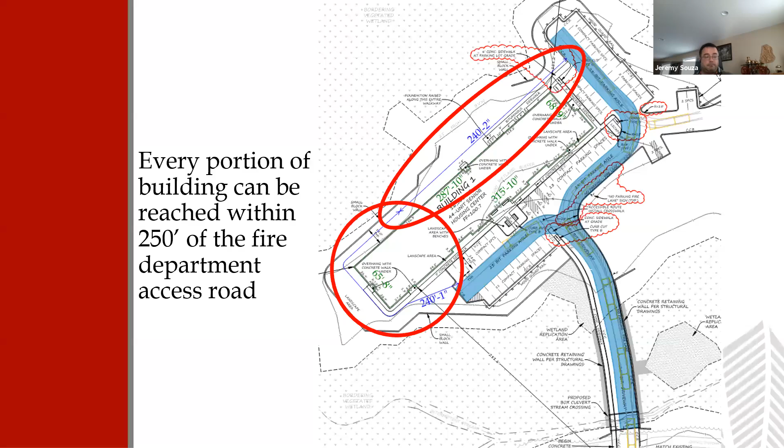Case study number 2. So this is a 40B housing development. I'm sure all of you are familiar with the 40B process. This turned into a very contentious project over time.

18 residential buildings, 8 and 9 unit condos, all 2 stories tall with a walkout basement. The fire department roadways: the road is a giant loop that goes through the facility, and there's little stubs for parking lots. So we had some turning radii questions that came in. The distance numbers are what hit us. The 50-foot rule, what is an exterior entry versus not, and then 150 versus 250, and then some other distances that the fire department tried throwing as well.

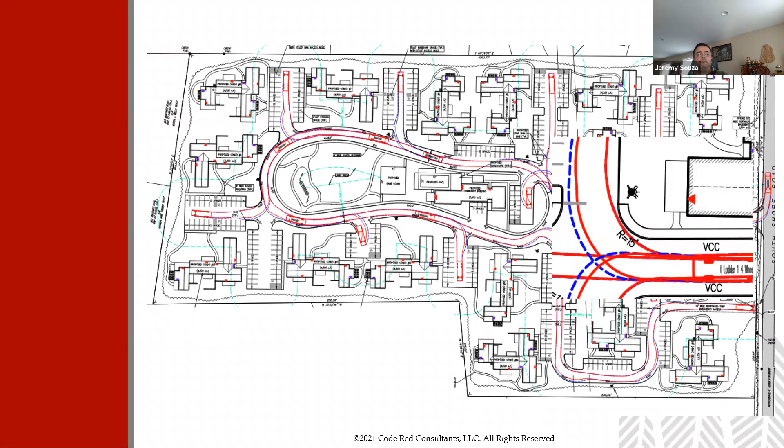So here's the plot plan for the entire subdivision. Kind of busy. I have some of them I colored in to make it a little easier to look at, but wasn't able to do with the bigger one. So you see the roadway that wraps around, that doubled up red line, that is a swept path analysis to prove that the largest fire engine for this community could make it through the site. We'll take a little closer look down here. So you can see the swept path analysis does show the fire engine can make it through.

So we'll zoom in up there. So here we have those 2 parking lots. The one on the left is a 190-foot dead end. The one on the right has a 240-foot dead end. We need to fix those dead ends. So how do we do that? Because on the site, we can't take away buildings. We can't loop the roadway outside beyond. So we need to do something.

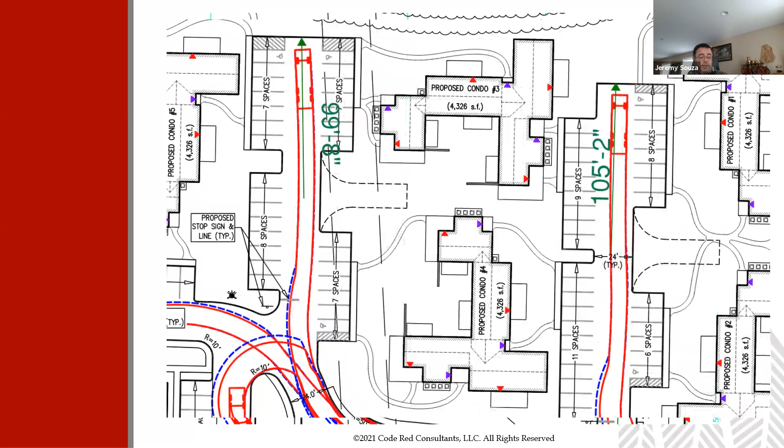And the civil engineer for the project came up with these little turnarounds. They're going to use permeable pavers and put grass there. The fire department was okay with that. Now that shortens my dead ends to about 100 feet. And the fire department has to approve that, and they were okay with the approval on that.

We saw this already, the 50-foot to the exterior access. In this case, we had 50-foot to almost every exterior access door in the building, except for that 118-foot one, which is a stairway going up to the 2nd floor. That said, we convinced the fire department the number is 50 feet to an exterior door, not all exterior doors. So they kind of rolled over with that. And then there's some other doors that were available.

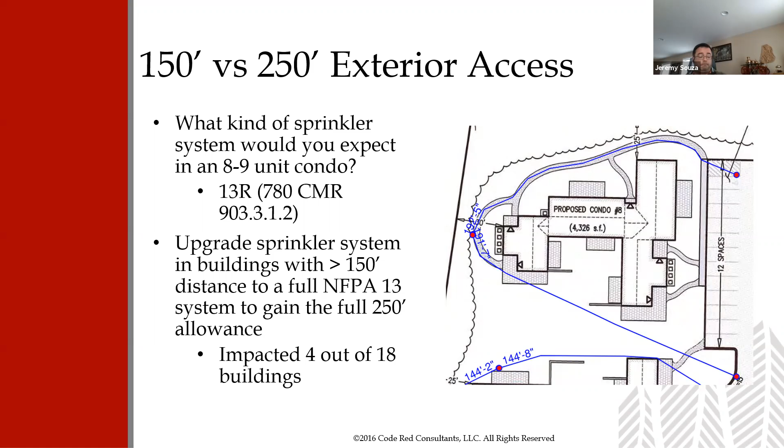And then the 150 versus 250. A few of the buildings had fairly long distances for exterior access. In this case, it was 191, 192 feet for this one. That's over the 150. The original plan was we were going to put a 13R system in the building. We upgraded the sprinkler systems in 4 of their buildings and got them a 250-foot number instead of 150. So a little bit of expense to increase your sprinkler system, but the offset is now you get to put the building where you want and don't have to pave around it. So that brings us pretty much up to the end.

That said, any questions or comments or mean, nasty things from anyone? All right, well, first and foremost, we need to thank you for a very thorough and detailed presentation. We don't get this topic very often, so this was an awesome thing.